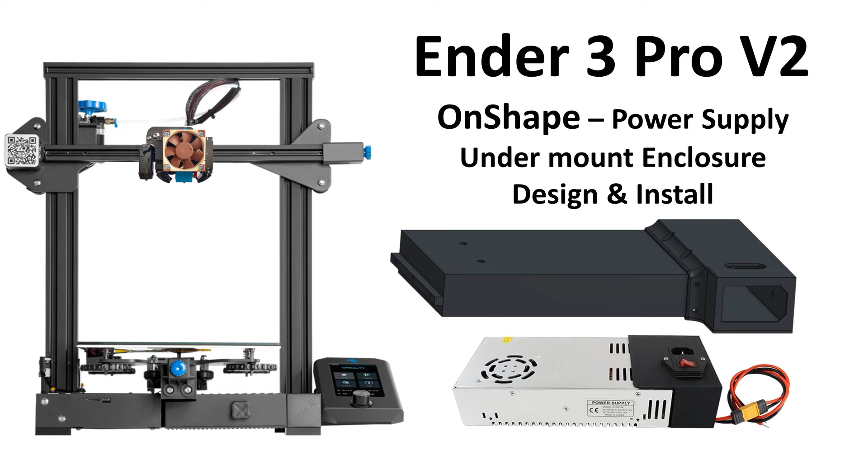Hey guys, in today's video we're going to be working again with the Ender 3 Pro. And one thing I wanted to change on this printer as soon as I got it out of the box and started taking a look at it is the placement of the power supply. I don't like the power supply mounted in the back like this. To me, it's not as neat and tidy as it could be.

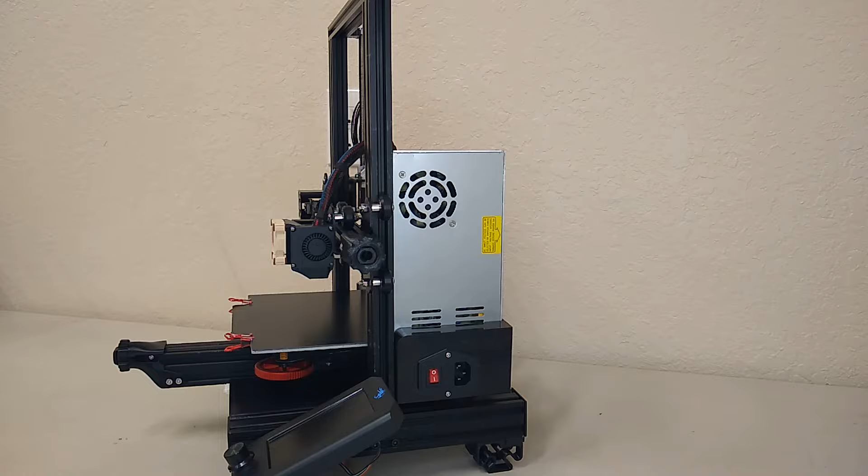So today's project is going to be to relocate the power supply to a similar location like the Ender 3 V2, which puts the power supply underneath the machine. So that's what we're going to do today. So let's start by taking some measurements. So I'll be doing that.

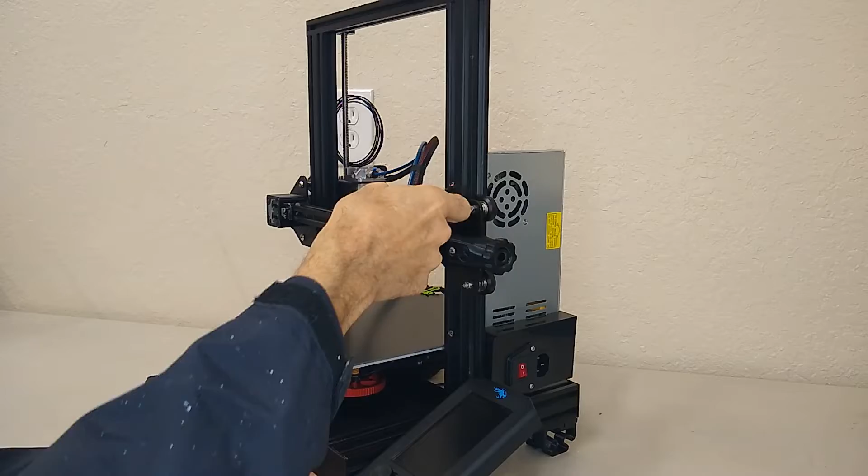All right, guys, so let's get started. I'm going to remove the power supply. And before you do it, make sure that it's unplugged and the machine is off. But to unbolt it, it's just two screws from the front. You got this one and this one here. And the power supply comes right off.

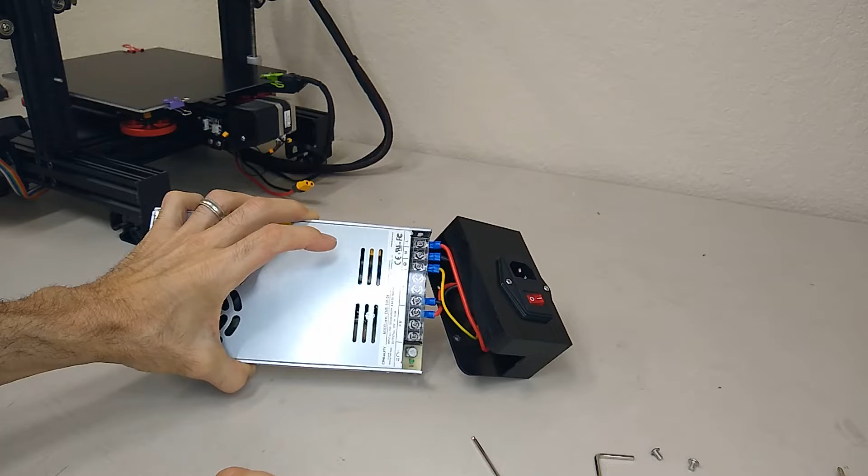All right, once the power supply is off, we just have to unplug it from the cables. And then we got to take the power supply out of its housing. So it looks like it's just held on here with these two screws. And once you got it like this, just flip up this little cover here and unscrew these three cables. And make sure that you write down the color order in which they're on these terminals.

So you got your hot wire, your neutral, and then your shield. And then everything is labeled here. So you got 24 volt negative on this side, 24 volt positive on this side. I'm just going to unscrew these.

And what I want to do is I want to place the power supply under here somehow. So the Ender 3 V2 has this metal box that fits in this space and is held in underneath by a couple of screws. So my idea here is to try to recreate that enclosure. That way we can relocate this power supply. All right, so let's take some measurements here and then jump on OnShape and try to create a version for the Ender 3 Pro.

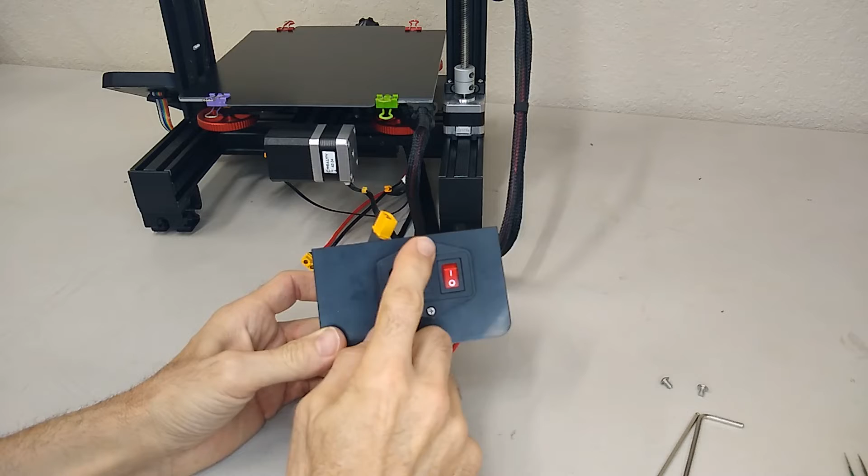All right, so what I need to do next is I'm going to unbolt this plug and switch from here. I'm not going to have the space to use these fastening points anymore because the measurements of the housing we're going to try to make don't allow for this large piece of plastic here. So I'm going to unscrew it from here and I'm going to try to trim it down and follow this outside edge as closely as possible.

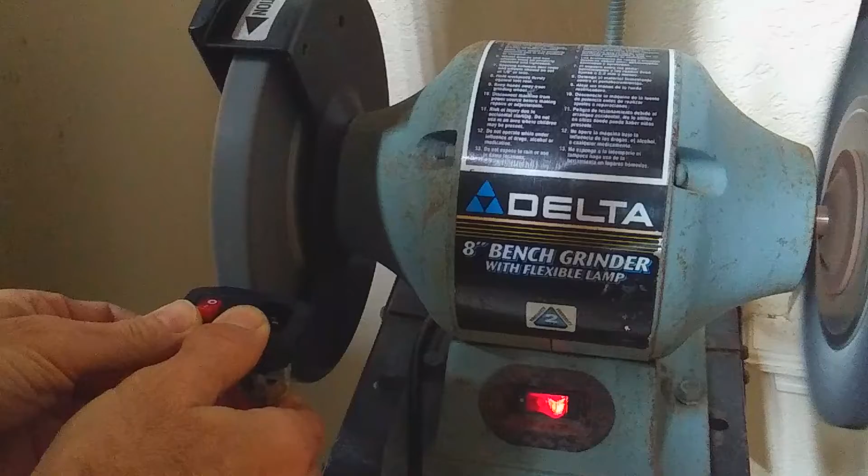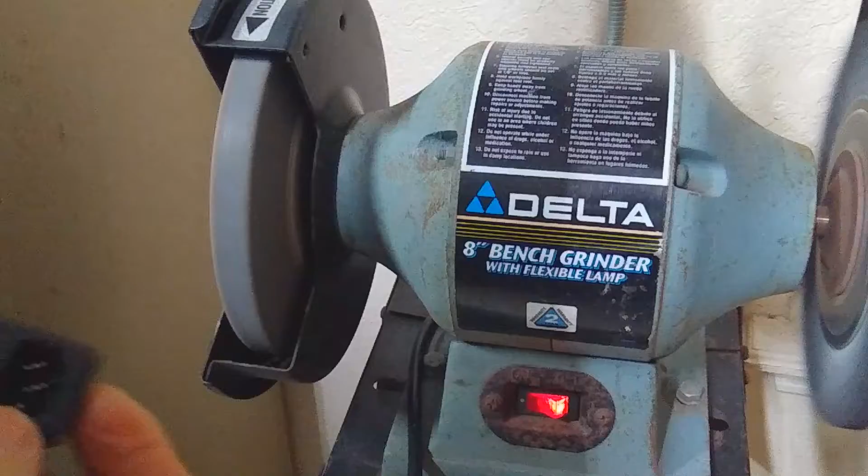So after a few prototypes, this one being too thin, this one not having the screws in the right position, this one having the opening too large, the right thickness for something like this is 2 millimeters. So if you guys are thinking about following along and recreating it like I did, make it 2 millimeters. That way it's robust enough that it will hold the parts firmly.

All right, so these are the parts that we printed. So this is going to be the bottom cover that covers the cables. This is the housing for the power switch, and it covers the terminals on the power supply. These are the two guides for the extrusions. So this is how we're going to hold this thing in. Also, I have a grommet here. So this is about a 22 or 24 millimeter grommet. And finally, the case for the power supply. So let's go ahead and put this thing together.

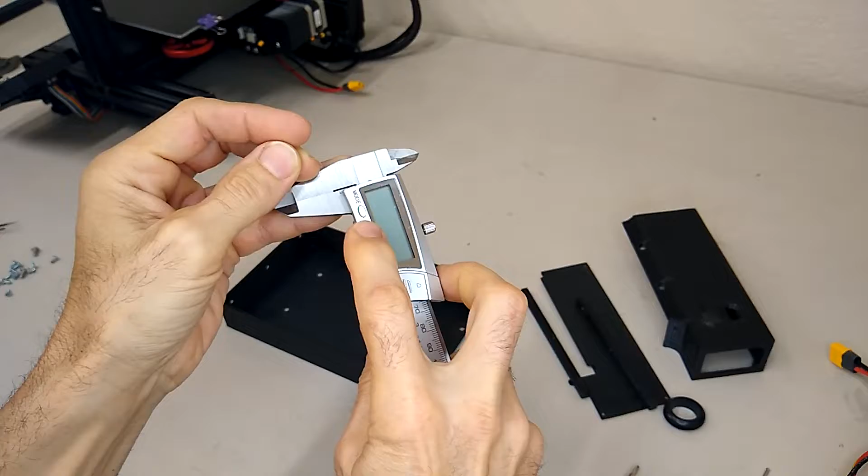We're going to need to modify some screws. So what we're going to need is some tapered screws like this. And this particular one is 3.5 millimeters by an overall length of 10 millimeters. So 3.5 by 10 millimeters. But some of these parts are not that long, so we're gonna have to grind the screws down a bit.

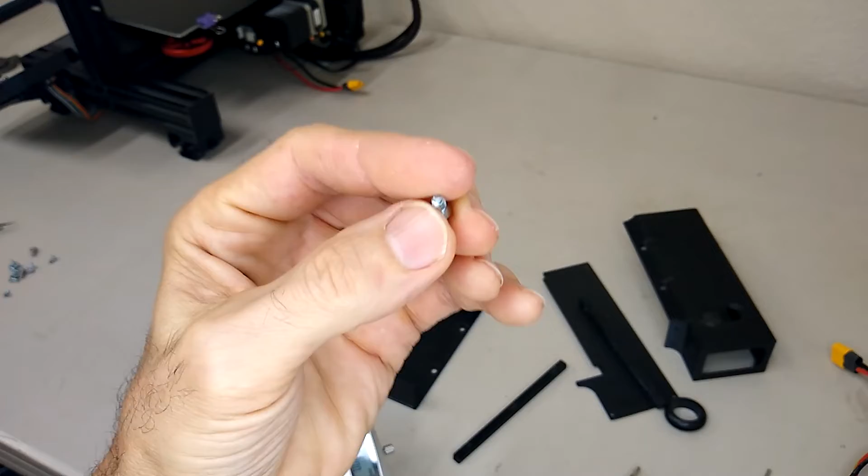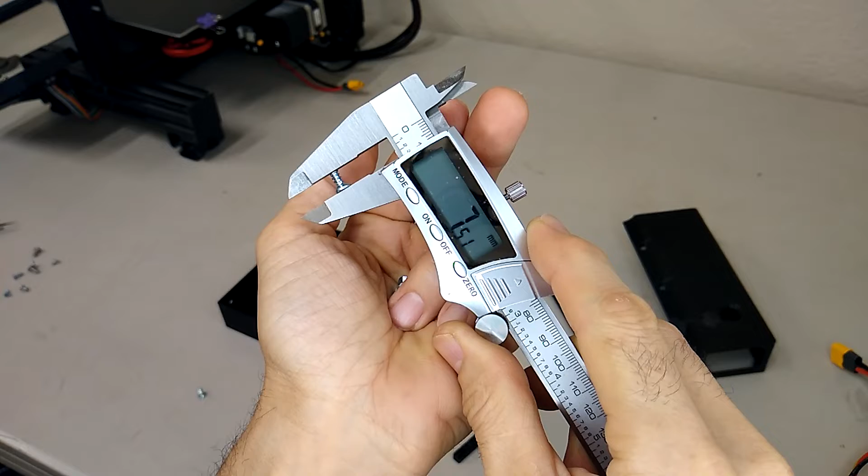So I already did this here, and I used the same bench grinder that I used to trim up that switch. So we're gonna need 6 of these done the same way. And let me see how long this is. I think this is, so we reduced it from 10 to 7.5. We're also going to need 2 more of those screws trimmed down even more. And these are 6.3 millimeters long.

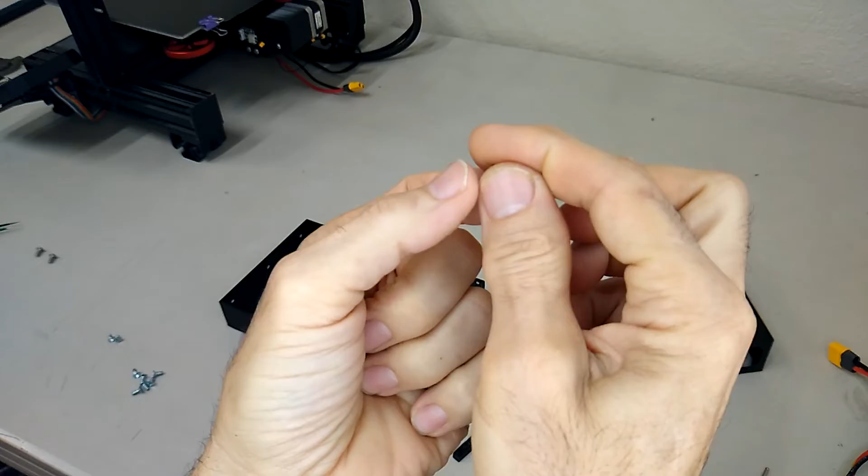We're also going to need some smaller tapered screws. And these are, I believe it's 3 millimeters in diameter. Yeah, so these are 3 millimeters in diameter by 10.5 millimeters long. We're also going to need screws that fit in the power supply. So these are a little bit longer because we got a little bit more plastic on one side. 4 millimeters in diameter, so 8 millimeters worth of thread.

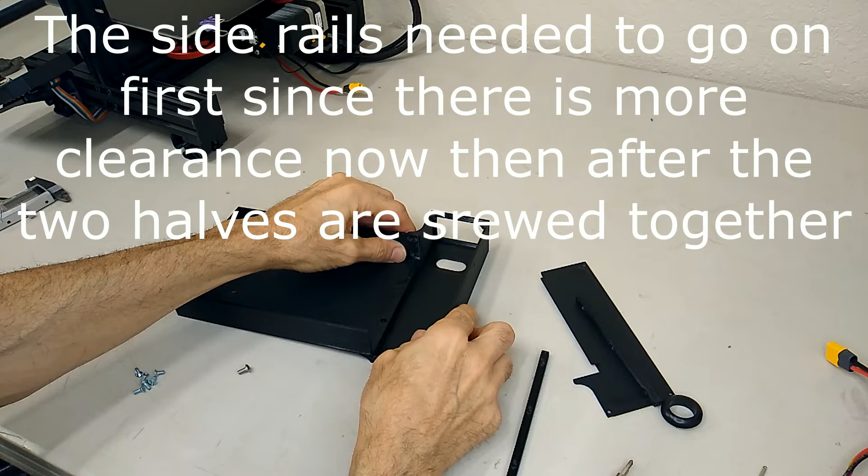All right, so to assemble it, we're going to need to start with the power strip cover, along with the plug holder. And this just goes one on top of the other, and this side has threads here, so it's got places to screw the screw into, and then the cover has the 2 countersunk holes. So I'm just going to put these together. And you need the shorter of these 3.5 millimeter screws here.

All right, next thing we're going to install is going to be these side rails. So just get your side rails. I'm going to do the same on the other side.

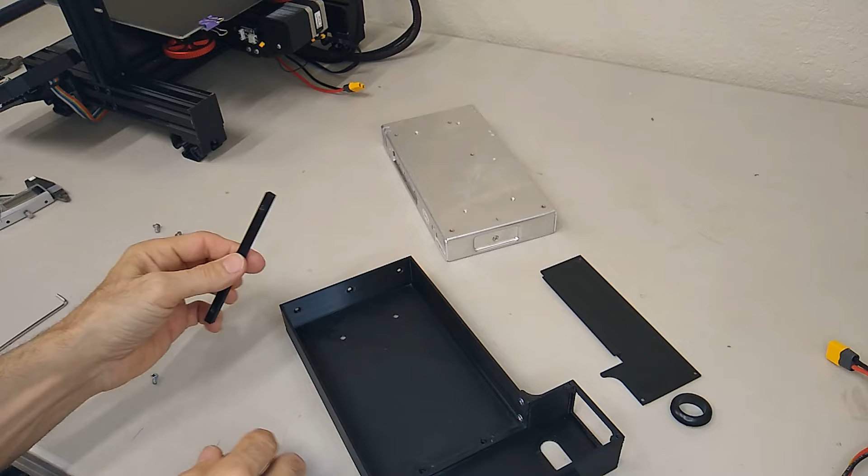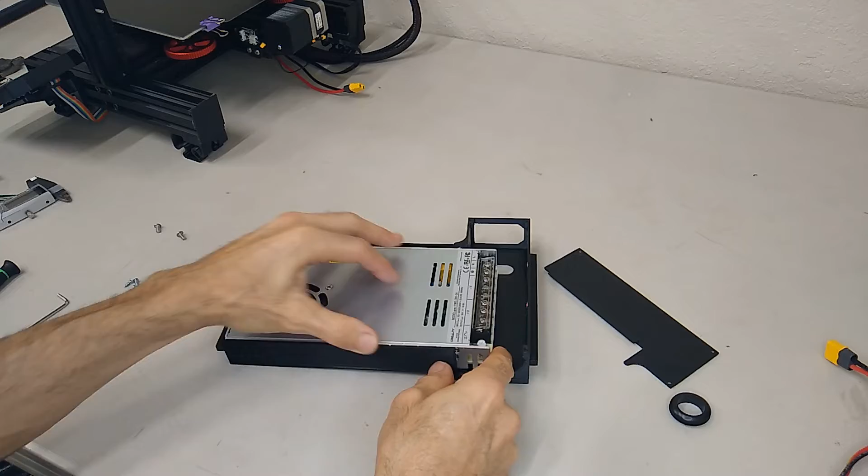Once you got both those on there, get your power supply, and we're going to put it with the terminals facing this plug side. Now when you flip it over, you should have the holes there. So on these two, the ones furthest away from the plug side, they get the shorter M4 by 6mm screws, and leave them loose so that we can make adjustments to the position of the power supply before finally tightening it.

So now what you want to do here is there's gonna be a gap here because of this screw on this side. So you want to make sure that the same gap that's present here is on this side as well. So I'm just gonna hold this side down with my thumb and then tighten the screws on the other side. That way all the spacing is even. And that's it. So that looks good right there.

All right, so this side on the Ender 3 V2, in one of my previous videos, I had cut out a hole in the metal plate. So this one, since I 3D printed, I designed the hole in here. And this is what you use this grommet for.

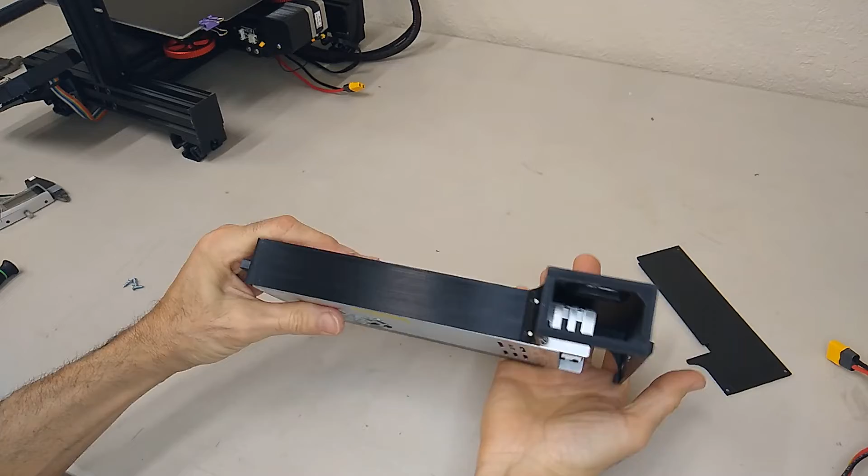And the reason we did this is we're gonna run the wires from the main board through this channel, make whatever connections need to be here, and then the ones that go out to the thermistor, the bed, and the hot end are gonna come up and out this hole. So we'll have good wire management, nothing's gonna be in the way, and it'll be elevated off the floor. All right, so let's test fit it under the machine, and then we'll start working on the wiring.

So what I'm going to do for now is I'm going to unplug the Y stepper switch and the stepper motor. I'm going to pull the bed back, and I'm going to put the wires underneath the leg to get them out of the way. That way we can work with the power supply. So you want the wires all the way over to the side like this. Pull off these extrusion caps.

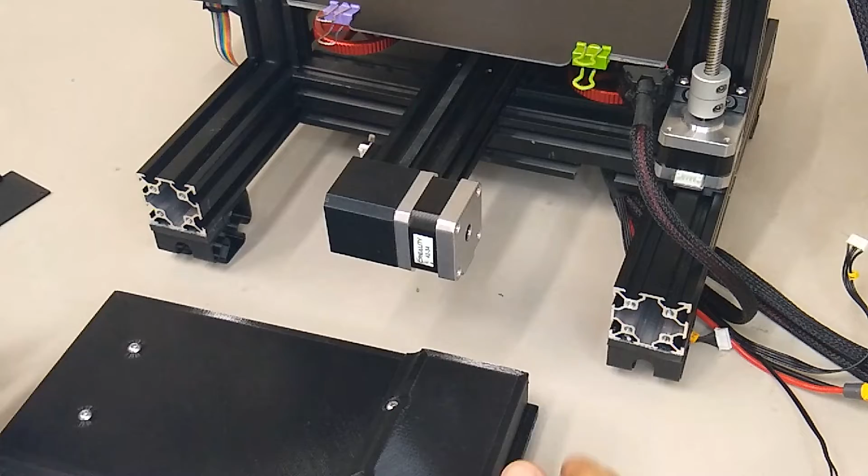And then we're gonna slide the power supply in like this. So it goes into these V rails. Let me zoom in and show you. So if you look carefully here, these side rails, they fit into these channels here on the aluminum extrusions. So if I got it right, it should slide in.

And there you go right there. All right, so that's it. We can put our aluminum extrusion caps back on. All right, now I'm going to get something to prop the machine up so we can work on the wiring.

Now to get all these cables through this channel, we're going to have to unplug them from the motherboard. It looks really tight there. So what I'm going to do with the Z stepper wires, I'm gonna run it another way. If you guys have downloaded my Raspberry Pi case along with the motherboard housing, it'll have this slot designed into it. That way you guys can use it to run cables through.

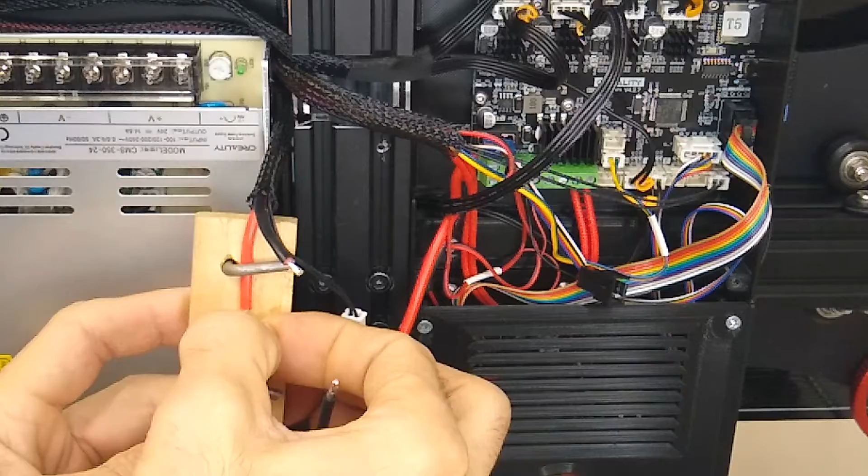Since the power supply is not going to be outside of the case anymore, I don't need this section of wire. So the plan is to just run this directly to the power supply, and then I'm going to use this section of wire for the heated bed. So I'm going to lengthen the heated bed with this cable. I'm just going to cut these, or maybe right here. So lengthen them by maybe 5 inches. And then I'm going to strip out these ends and solder them.

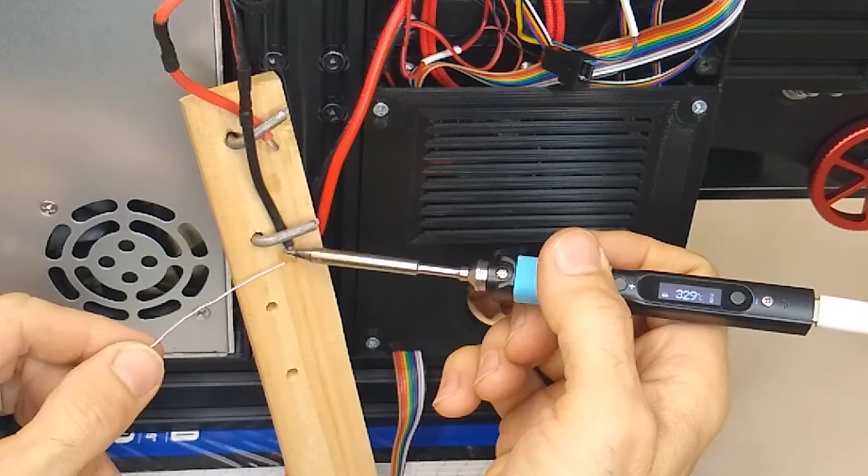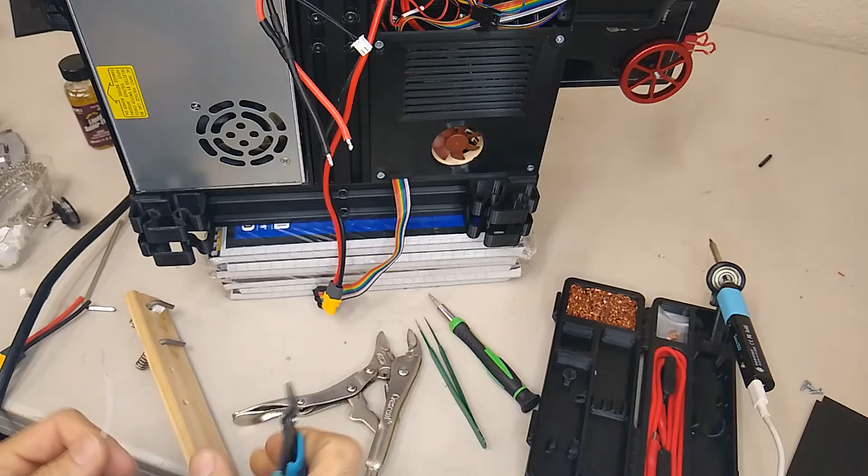Okay, so for the thermistor cable, I'm just going to use a JST connector. And it doesn't have to be very long, maybe 5 inches. And since we're putting JST connectors on these, you just have to strip just the slightest little bit, maybe about 2 millimeters.

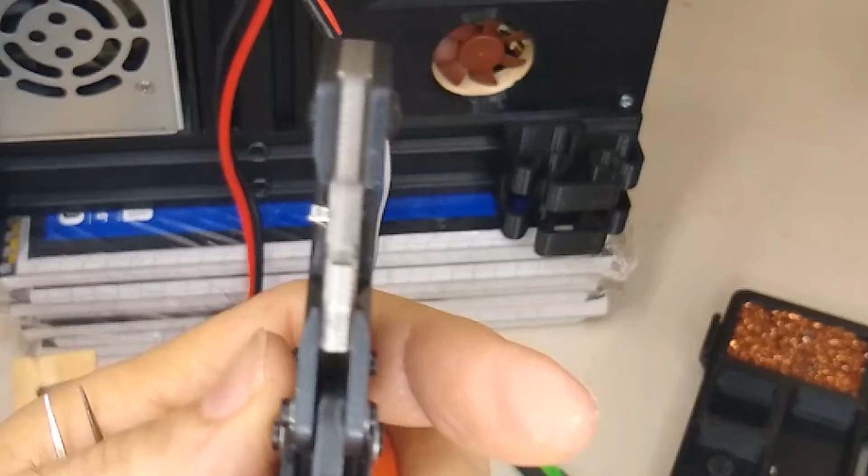Now for me, I find it easiest to load the JST connector using a set of tweezers. So just get your tweezer, your JST crimper, and you're going to line it up in there. Click it once, make sure that there's a little gap. So if you see the connector, let me zoom in here so you guys can see that. You got to make sure that you have that little gap between the end of the connector and the tool. Otherwise, when you crimp down, you'll crush it.

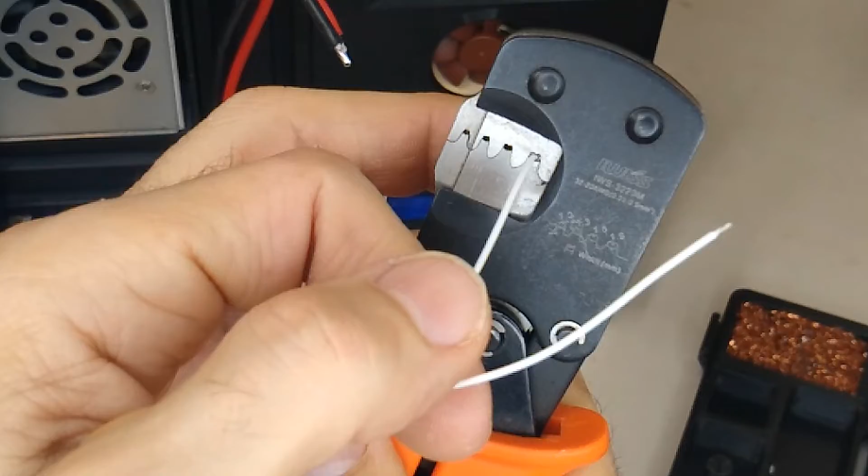And then just put your wire in through this side like this. And as soon as it goes in, you can crimp, and let's check and make sure it grabbed the wire. Yeah, it did. Perfect. Okay, we're gonna do the same thing with this one. And I'm gonna load it on the tweezer, get it in the gun, click it once,

and then take my wire, carefully feed it in there, and crimp. And let's see, yeah, that one looks like it grabbed the wire good. This one I'm a little bit worried about because it looks like it might have grabbed some insulation, but anyway, we'll test it and see.

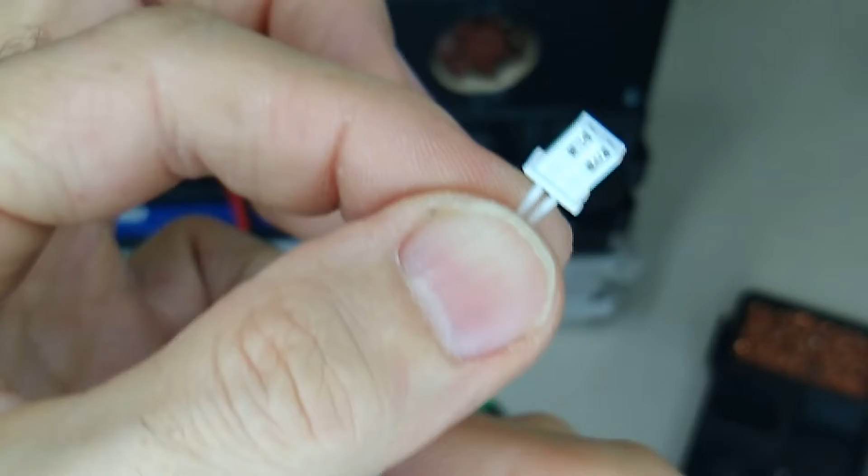And on these things, it's just a straight through connector, so it doesn't matter really which one goes where. I'm just going to twist these around. And you want to push them in until they lock. Just like that. There you go. Okay, so now we got this little jumper here. Extender. That we can use to plug our thermistor back in.

Alright, so let's go ahead and put this back on. And then this is going to go wired straight, so I'm going to go ahead and start moving this wire to this position. I'm going to cut this end off. I think I'm going to put a piece of loom like this on here. That's interesting, this wire is cut here.

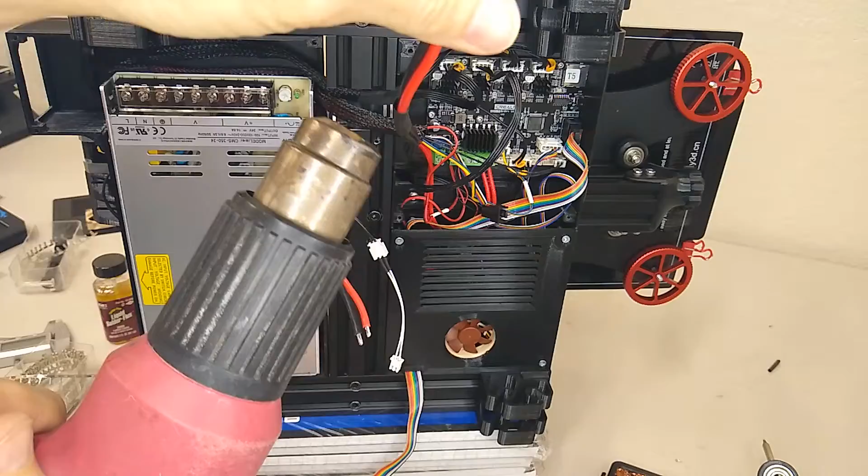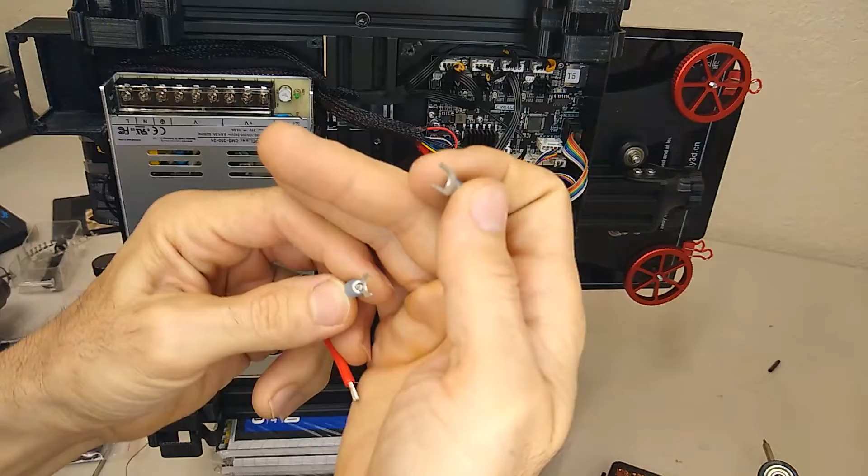So now I'm just going to use a set of crimpers and a couple of connectors. So these are just terminal connectors. And if you look carefully at these terminal connectors, they'll have a slit on them. Let me show you the slit. It's kind of hard to tell, but if you look right here at the very top, there's a slit here.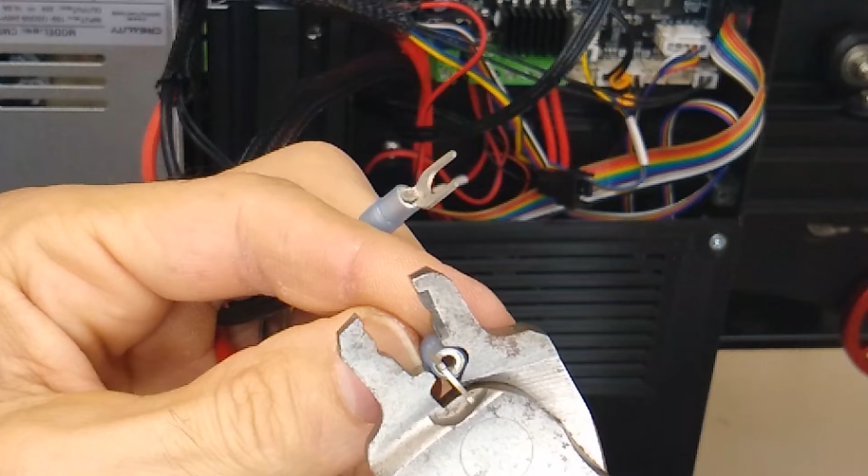So this slit, I used to work in the car stereo industry for many years, and how you line this up is you got a tool that looks like this. So it's got a pin and then it's got a rounded part. The pin needs to go on the bottom, so that the seam of the connector sits inside of this rounded part of the crimper. Otherwise, if you do it the other way, you'll press one side of the seam down, and it won't crimp evenly. So anyway, this is just a little tip.

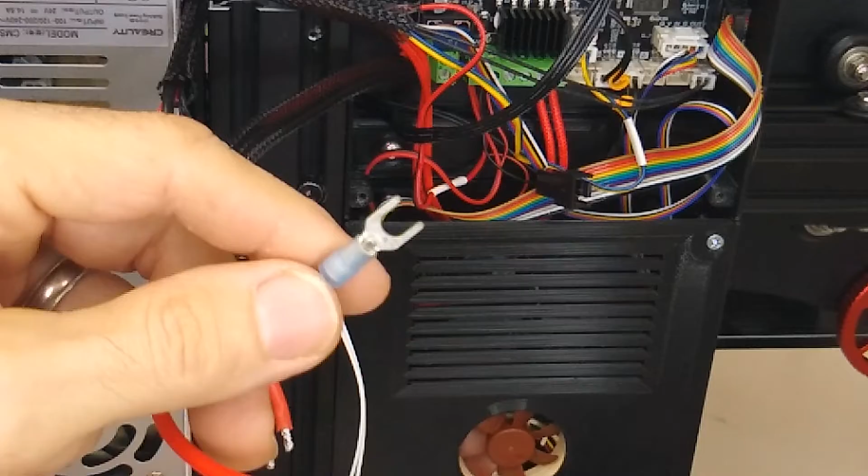All right, so I'm just gonna grab this thing and crimp it. And there, that's got it right there. So if you look now, you got a nice good crimp, and we didn't split that top part. So the power supply is labeled positive and negative. So this is volts, positive and negative. So you're going to put one positive on the plus side, and then the negative on the negative side.

Okay, we've got our power supply almost done. And so now let's finish up this side. So I'm going to plug in the heated bed cables, if I can get them sorted out properly. Okay, it's got that. And then lastly, plug in the heated bed thermistor. Barely. Anyway, give yourself more than 5 inches of slack when you're doing this yourselves. There it goes. Definitely did not give myself enough slack. All right, there it is right there.

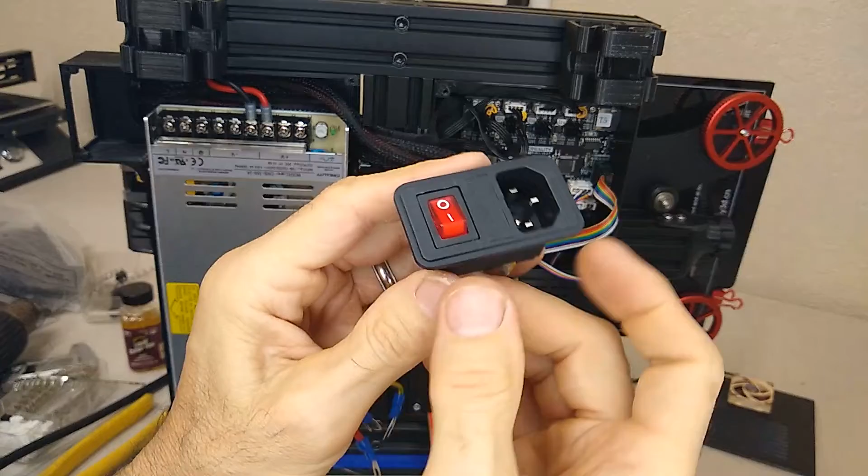I'm just plugging in the Z stepper motor and pulling the slack back in here. That way everything looks nice and tidy. All right, so I'm gonna plug in my little fan here and double check to make sure that all this stuff is working. All right, now back to the power supply. So now this is how we finish trimming up our little part here. So now I'm just gonna push this thing in here, and I'm gonna probably have to glue this, but I'm just gonna put it in there for now. It's a pretty tight fit.

And so the red one goes here where it says L on the power supply. Next one is N for the neutral. And they had black here when I took it apart. And then finally the shield. So the shield has a little ground emblem on it. All right, so now I'm gonna plug it in and turn it on and see if my fan comes on. Make sure you leave room for the fan to sit inside this little space here. Now I'm just gonna turn it on to check. Yep. All right.

And then lastly, just button it up. Not the right screws. And I really need to do a better job of organizing the cables inside the motherboard area because they look bad. All right, and then lastly is going to be the cover for our power supply. So we're going to use this part here. And let's see if we can get it in here. Yep. Good thing about this particular model that I made is that I left this completely open. So if you wanted to do the 120 millimeter fan upgrade, what you're removing is this aluminum cover here. So there's plenty of space left to do that mod. That'll probably be a future video. All right, and that's it.

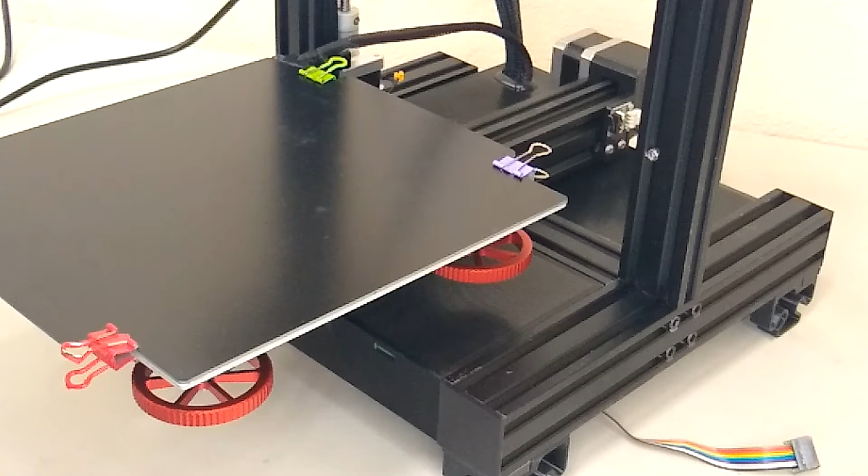I still have to route these wires over here. You can see. Yeah, so these wires here still need to be routed, but I'll do that later. So what I plan to do is just stick them inside this extrusion here. Actually, you probably do it now. And I may have to 3D print some covers that'll fit in there to hold them nice and neat. Let's install our display. And this machine is going to get Klipper. So this screen is not going to stay for much longer, but in the meantime we can actually use it before I get to putting Klipper on it.

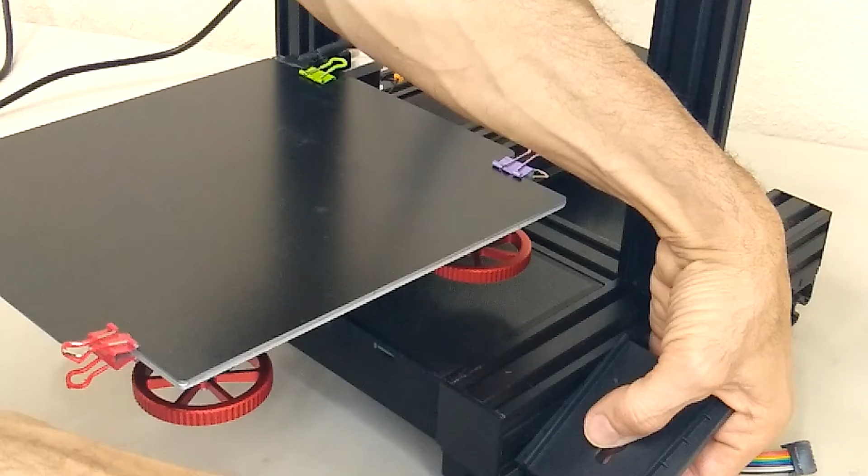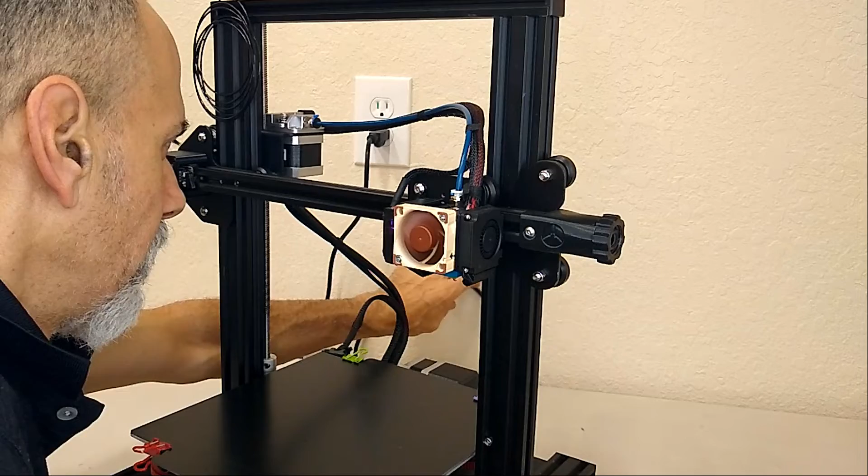All right, so let's check it out. All right, so now let's look at our wire management. There's our wire management now. No need for drag chains or any of that stuff. We got the hot end all the way to the top. So we run it down. We pick up all of our slack down here. All right, so I'm going to go ahead and turn it on. And I think it looks much neater like this than with that power supply on that extrusion on top. All right, let's home it.